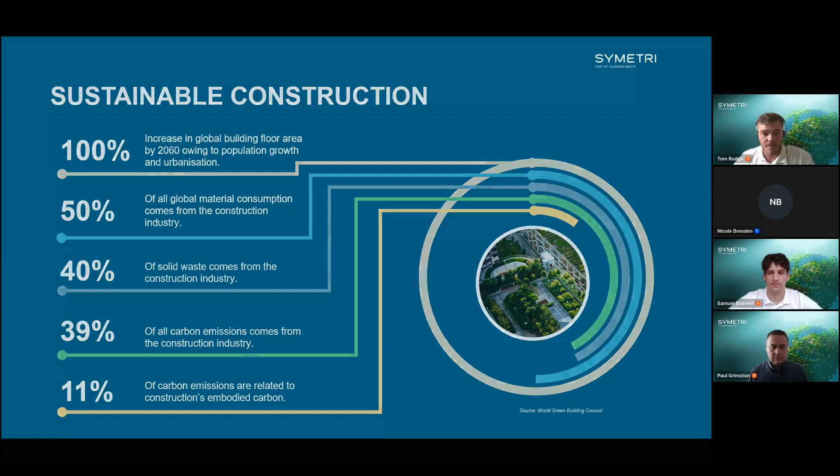So how can Symetri help you towards a net zero and carbon neutral future? At this point, I would like to pass over to Samuel Boswell, who's going to give you an overview of lifecycle assessment and what exactly this is. Thank you, Tom. So for those of you who are new to LCA, lifecycle assessment is a systematic methodology used to evaluate the environmental impacts of a product, service, or process over its whole lifespan.

These days we generally talk about carbon, and a lot of us are here to focus on reducing embodied carbon, but an LCA does in fact take into account other forms of pollution. These are called impact categories, and they cover things like acidification, eutrophication, ozone depletion, and so on. So there's quite a few different things an LCA can focus on, but it will be looking at every aspect of a building, product or service, whatever it may be.

LCA is a very standardized process. There's a number of ISO and EN standards that explain how it should be done. The most base level one of these is ISO 14040, which outlines the way in which any form of LCA, regardless of what it's being done for, should be performed. But for a building LCA, you would be following EN 15978. The various green building certifications, regulations, or guidances out there are generally derivatives of this EN 15978 standard.

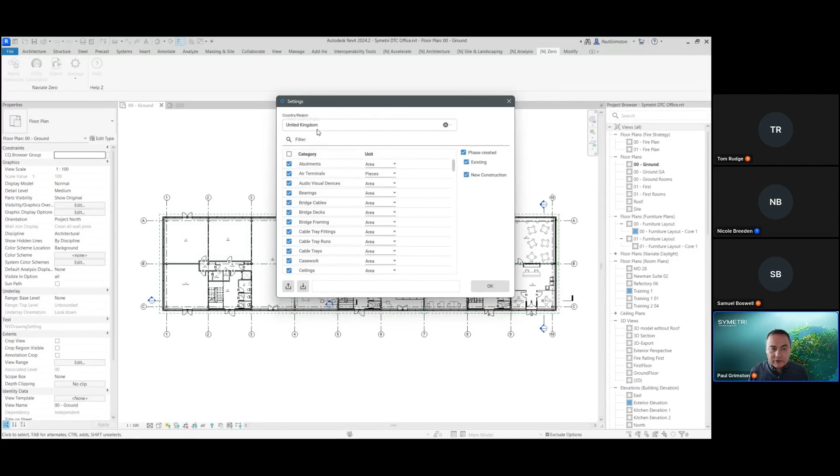First steps we need to do to start working out the embodied carbon is just to go into the settings. And this just allows us to locate the project. So first, I've got this set for the UK, but we can obviously choose any country we like. And this, when we're searching for materials from the EPD database, restricts it to this country. So we can make changes to this a little bit later on. We can also control phasing. So if we've got certain phases within our Revit model that we don't want calculated, we can just uncheck those. That's nice and easy to do.

And then the big list in the middle here is just determining exactly which categories in Revit we're actually going to perform the calculation on. So it may be that there are certain things you have in the model that you don't want calculated, and therefore we can just uncheck those categories en masse. And equally, it's also setting the default units we're going to use for the calculation. So things like curtain wall mullions, we've got set to length down here. If we're including furniture, it's probably going to be calculated in pieces rather than area or volume or anything like that. And we can just set these settings up as we need them for our project.

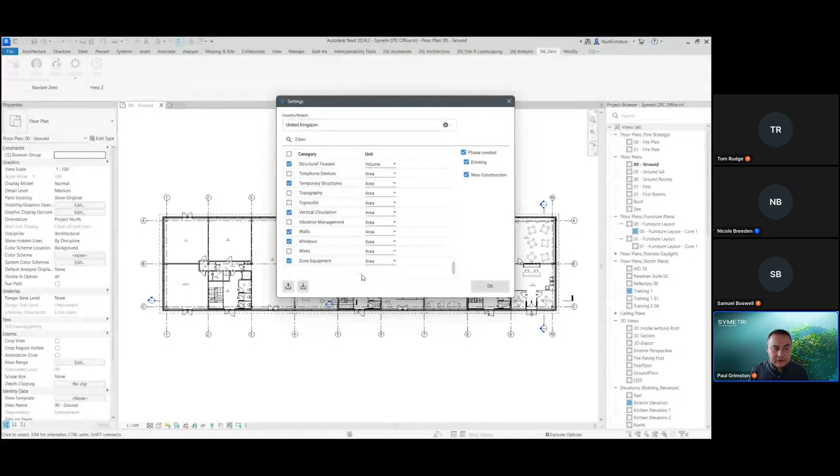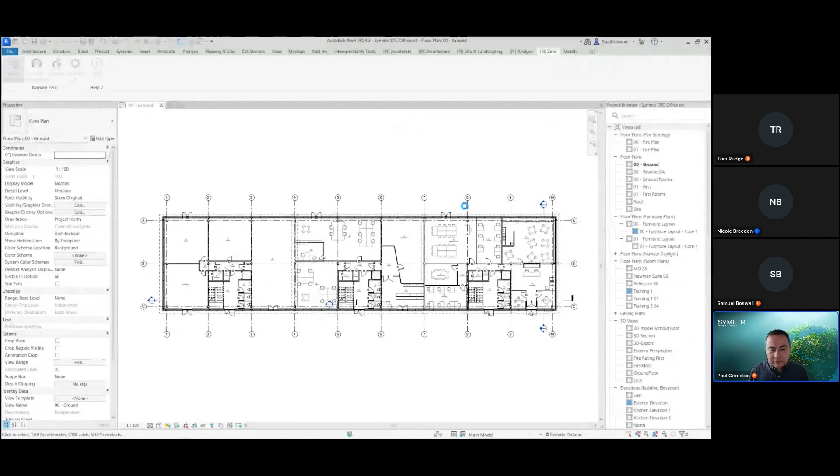Just a little note, we've got the ability to import and export the settings, so if we set this up in one file, we can export it out and import it into other models and save going through this every single time. But once we've done that, what we actually need to do is apply the resources to the objects in the model. So clicking on apply resources, it will scan through the model, and once it pops up, it's going to list out all of the families that have been placed in the actual project itself.

So looking down the left-hand side of this box here, it's quite a big box. It can be moved onto separate screens, it's not a problem. But essentially on the left-hand side, we've got all of the families that have been placed in the model. On the right-hand side are all of the EPD data.

So this is all filtered to the UK, but this is coming through from the One Click LCA database of materials. So we've licensed access to this, and this is now live used inside of Naviate Zero. So what we're looking at on the right-hand side are all of the manufacturers and generic EPDs that have been published, and One Click LCA generally aggregates these from pretty much all around the world.

I'm confident in saying that it's actually the largest database we've got access to in the world. So this really makes Naviate Zero a very powerful tool by having access into that One Click LCA database of materials. So essentially what we need to do is find the objects that we need to apply resources to.

So as you can see, I've done quite a bit in this model already for the demonstration, but as we scroll down through the categories here, we'll get towards the walls at the bottom. And we can see all of the wall families are listed out here. So the ones that I've used in the model are listed. And we've got two ways of doing this.

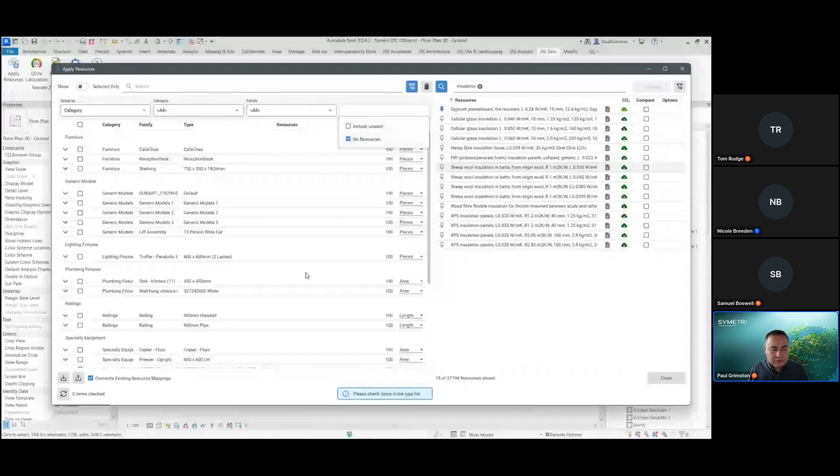And then if we go and search for, say, the plaster again, then we can just see the materials within the families here that are using that plasterboard material. This then gives us the option to be able to start to copy and paste the resources between layers as well. So it makes it a bit quicker and a bit easier for us. So we'll clear that one out. We'll swap it back to category. And we've also got some options here that allow us, once we've assigned a resource, to take it out of the list so that we can see the ones that don't have resources. And these are the ones we need to work with.

So we need to go through and apply this. Again, it could be quite time consuming. So this is something that you could do in a template. But equally, we've now got the options to export and import the resource mapping as well. So once you've been through one project, you can import this into the next project and then make changes as we need to. But once we've been through this, I'll close this down. And essentially now we just need to run through and do the calculation. So we'll click on the calculation here, and it's actually calculating it as it goes. It doesn't take too long, but obviously it's got to scan through the model and actually perform that calculation.

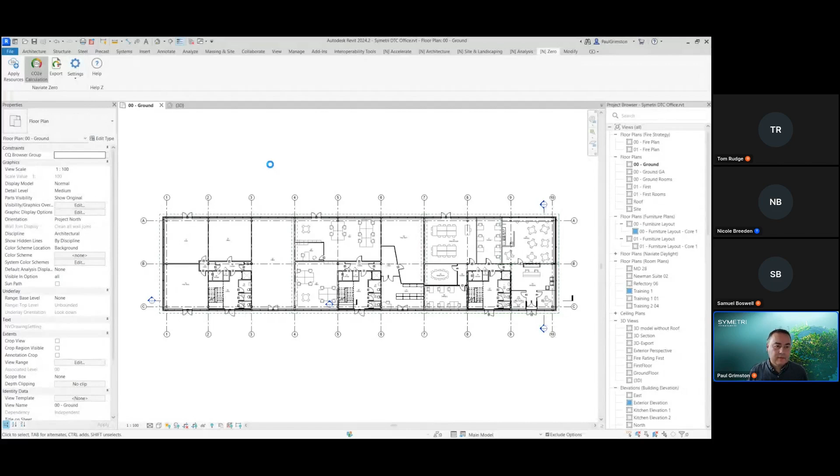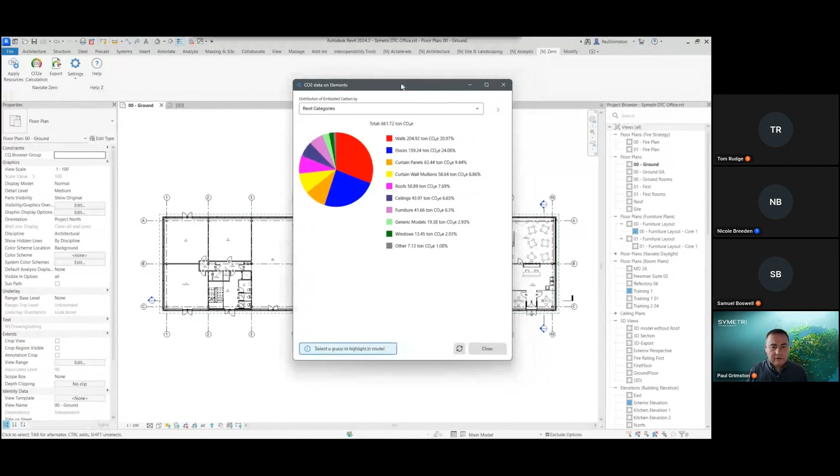And it brings it up in the form of a pie chart initially. So looking at that, we can see the total tonnage of CO2 emissions here. And then we can see the breakdown to the different categories. And actually the model's still interactive, so it's not frozen out. We can still swap between views.

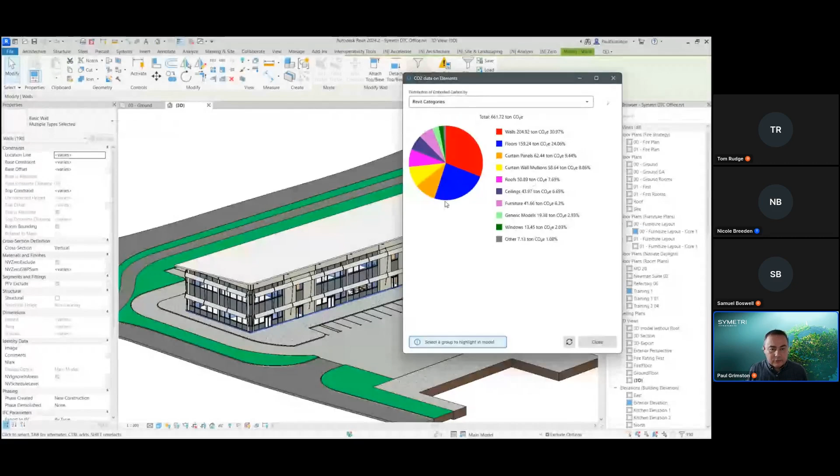And what we'll see then is as we click on different things in here, so if we pick on the walls, they actually get selected. If we grab the mullions, we can see that they're being selected. We can see exactly what's actually being used to perform this calculation and what's actually contributing to the values here.

We also have an expanded panel. So again, once we've got that open, we get a bit more detail as to the numbers that are actually making this total over here and how it's split down between the different wall types. If it's a single material, then that will be shown here, and we'll have access into the EPD data again, so we can see that.

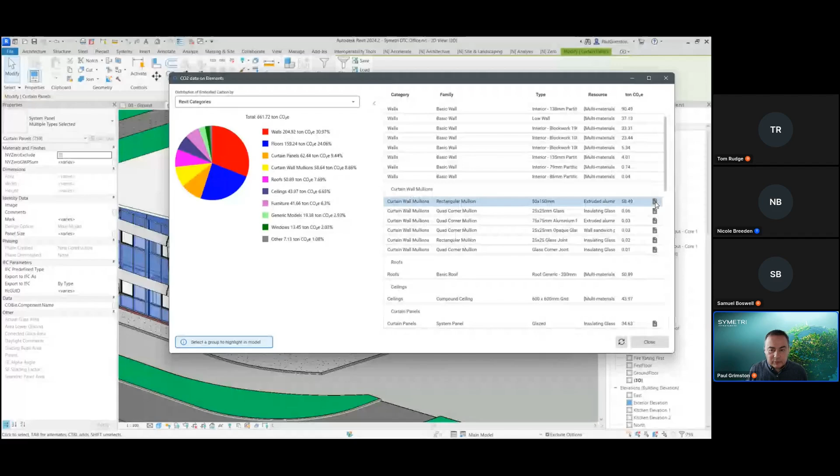Obviously, where the walls are made up of multiple materials, we're just getting the total for the walls at the moment. But again, we can also swap this to show it by material as well, by categories, by resources. So again, we can see the different material types that are making up the totals here. And again, this details panel is then showing those materials. So we can see exactly what's coming from each material.

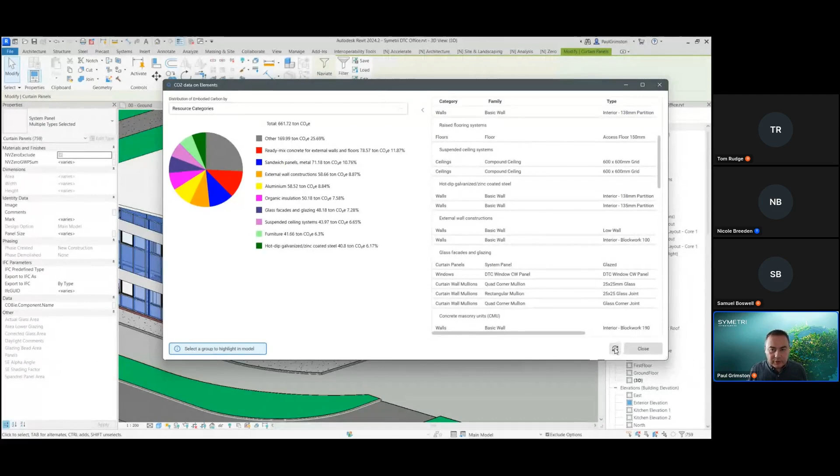So having run through that, that's the calculation there. We don't need to close these windows down, obviously, because we're just seeing one screen. I tend to do that. We can leave it open. It does have a refresh button. So if you go back and you make changes, you can just hit the refresh button. But it doesn't take too long anyway, so I tend to close it down.

And then looking at the objects themselves, so if we zoom in and we grab one of the objects here, let's grab one of the doors, for example, then over in the properties, we've added in the actual global warming potential of that individual object there, so that one component, and that number is actually done in kilograms of CO2. And also if I click edit type, then we can see the actual EPD data and the total for that type. So obviously, if I've got 10 of those in, then this is the total for all 10 of those.

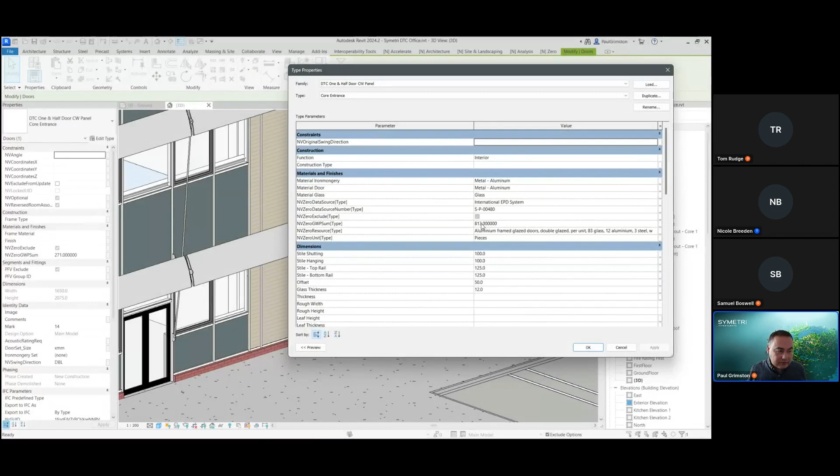Okay, and that carries through to all of these things. So again, clicking onto one of these windows here, we can see that, and we can see all of the data inside of there. So it actually puts it into the model and bakes it into the parameters. And therefore, what it also does is creates a schedule for you. So we have a global warming schedule just here, the GWP schedule.

So it's all listed out across all of the components with their data. So families, types, resources, the data that it's using, and then the total in the end just here. Obviously, this is a default schedule, so we could customize this a little bit if we needed to, if we wanted to add the count in, or if we wanted to calculate it in different ways, we could do that as well.

And obviously this schedule allows you then to export this data out. So if you need to run this across several models, we can export this out to Excel and then maybe build up some kind of dashboard in something like Power BI to give you totals across the project. And also when you're running different alternatives and options, then obviously you can make changes to the model, rerun it, export out the new set of results and start to do comparisons as well. So the fact that it gets baked in is quite a nice feature in here.

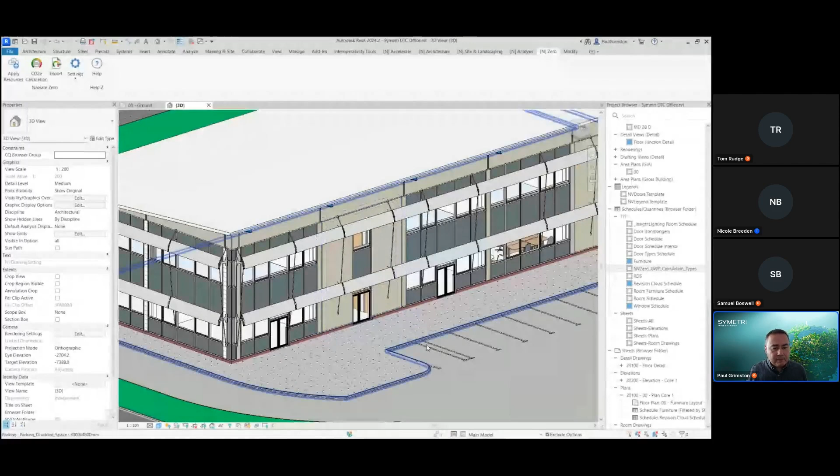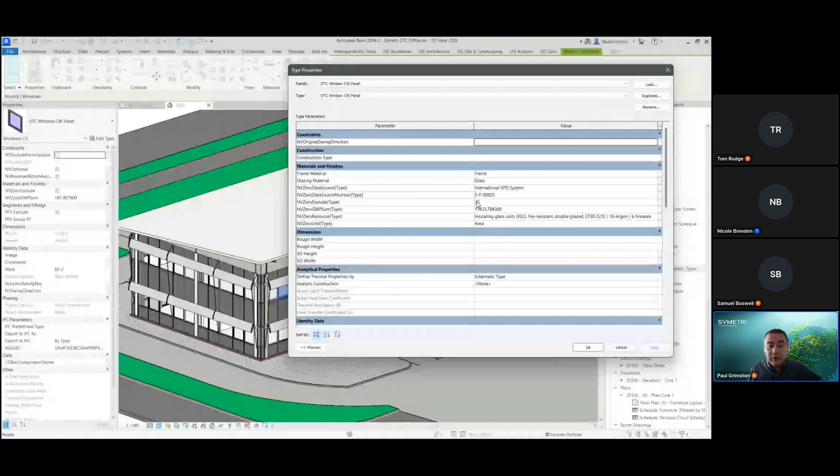A few other little bits in there, so just to be aware, we can exclude individual objects. So for example, if we were using a floor for the external works and we didn't really want that, but we wanted the floors inside the building, we can exclude those individually. Or equally, if there's a type of object, we can exclude the type as well. So rather than doing it by category, we can also exclude by type and by individual objects as well.

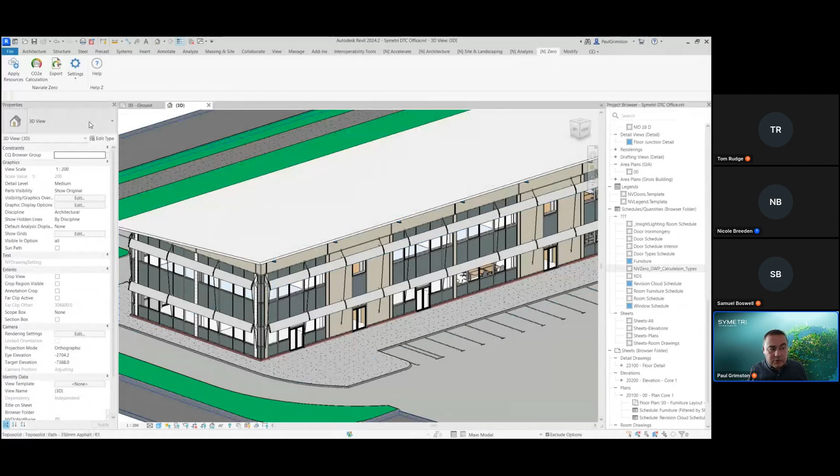So then, having gone through all of that, obviously we can rerun that. Once we get to the point where we're potentially looking to take this further on and perform a larger life cycle analysis in there, then we have the option to export the data out. So clicking on this will send this out to One Click LCA. So it's got a direct link to that.

So in the background now, it's actually extracting the data out, and it's going to open up a web page and get us to log into One Click LCA. And to be honest, at that point, I'm going to hand you back over to Samuel, who's a bit more au fait with the One Click LCA process.

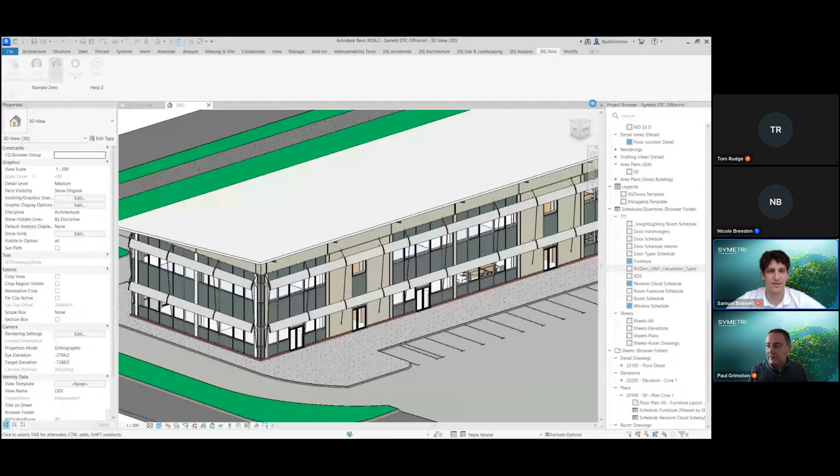Great, thanks, Paul. Yeah, so once you've clicked the button, it's going to bring you to the import process into One Click LCA. So firstly, One Click is a web-based software, so there's nothing really to download while you're using it. And also this is the import process for all sorts of integrations. And it's just simply a chronological process.

So we start off with settings, which you can see as the page here, where we choose the project that we're going to import the data into, the specific design within that project that we want to add the data to. We choose the calculation tool, although truthfully, it doesn't make a huge amount of difference which one you choose. I'll select all data so that I know that everything's being included.

And then you have the option to either replace it, add to it, or just update the quantities. It's worth noting that you can actually add a completely new design if you want, but in this case, I'm going to just import to one existing. And so the next steps are very straightforward. Just to save on time, the most important one to focus on is the mapping, because this is really how the Naviate software works so efficiently.

But just to clarify, the classify section is where you're choosing which classes or classification system or categories you're using from in the Revit model, and which of those apply to the categories within the One Click software, so that you know that all of your data is going into the right place. Filter, you're simply choosing what things you do and don't include.

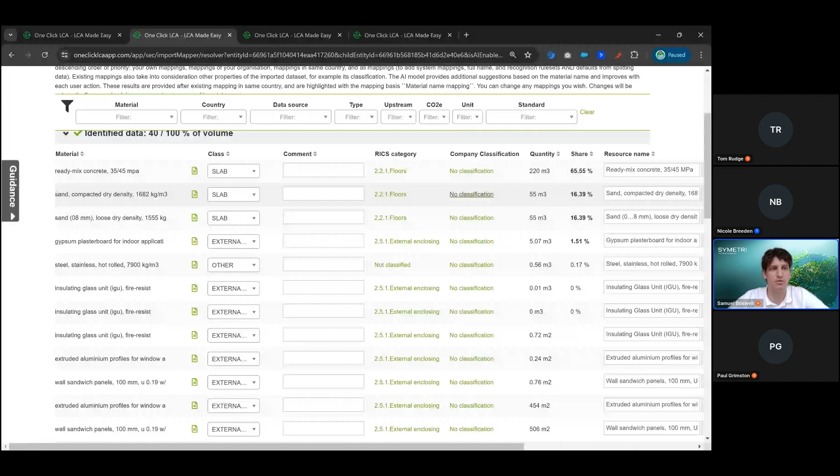The strength of the Naviate plugin is that it's already using the One Click database. So there is really no mapping that's required. You know, if you look at any of these things, so carpet tiles, nylon, polyamide, it's exactly the same material within here. So it already knows what material it should be importing, and everything here is correct. You can see that the mapping basis is telling us that it's mapped in model.

And once you've done that, you simply click continue, and that will then bring you onto the results page, which is here. So you can see this is the name of the project that I was importing into, Achieving Net Zero, Naviate Zero webinar. This is the design, so my option 1 baseline. And then this was the calculation tool, the RICS Whole Life Carbon Assessment Guidance tool. It's the standard tool that you would use in the UK.

So we get results with the life cycle stages across the top here, and then the total. You've got the building elements according to their RICS classification, and then the number is, of course, the respective kilograms of embodied carbon. So if I go a little bit further below that, you have a section showing the most contributing materials.

So you can see which materials within the building are producing the most amount of carbon. So, for example, this raised access flooring panel is 72 tons of embodied carbon, and that's 14% of the project. So I could then show sustainable alternatives, and it will give me a list of other similar materials with similar properties that would be a more sustainable choice to go with. So it's great for improving the decarbonisation of your project.

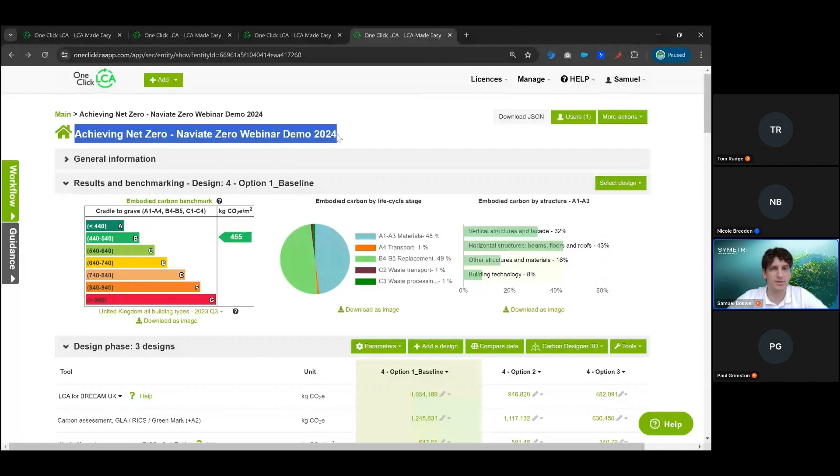And so just one quick thing before we go on in terms of results. This is what we call the project homepage. So this is actually the project here. You can see my option 1 baseline is what I imported the data to, but I do also have a couple of other designs, and we're able to compare what the impacts of these different designs are. So all the different ways that we can examine what the impacts are.

So this one's the total amount of carbon. This one's the impact per life cycle stage. And then this one's showing the impact by building element. So you can really see where the hotspots are coming from. So external enclosing walls, for example, in this one are much lower than in my option 1. So that could probably be a better choice in terms of my design. So all the graphs can then be downloaded as image files or the Excel data.

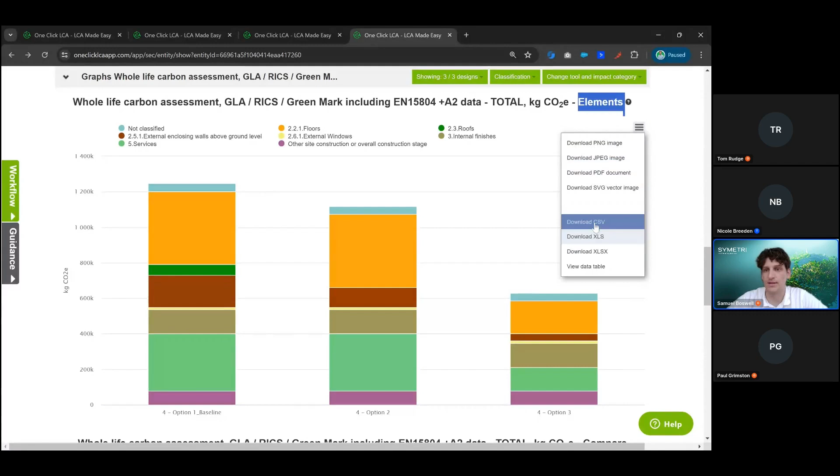So at this point, I'll stop sharing and I'll pass it back to Tom. Thank you very much for that, Samuel.

So I'm going to just touch on this point first. As you can see, there's a statement here that says Naviate Zero empowers everyday designers with tools for informed decision making. Hopefully from seeing the tool now that Paul showed and also how it integrates into One Click LCA, it makes you realize that this solution is much more than just a bit of software for one person on a team or one license in a company. The idea of this is that you're able to get this across your team. Each of them can have the ability to improve their decision making through the choice of materials that are used from project to project.

I think the key bit is that with it having access to the One Click LCA database, having that ability to bring all those EPD certifications through, you've got it all in one place. And the fact that you can do this while clicking on model elements, and you can, of course, assign that data and put the data embedded within each of the properties in Revit, really brings the power in regards to being able to use this bit of software.